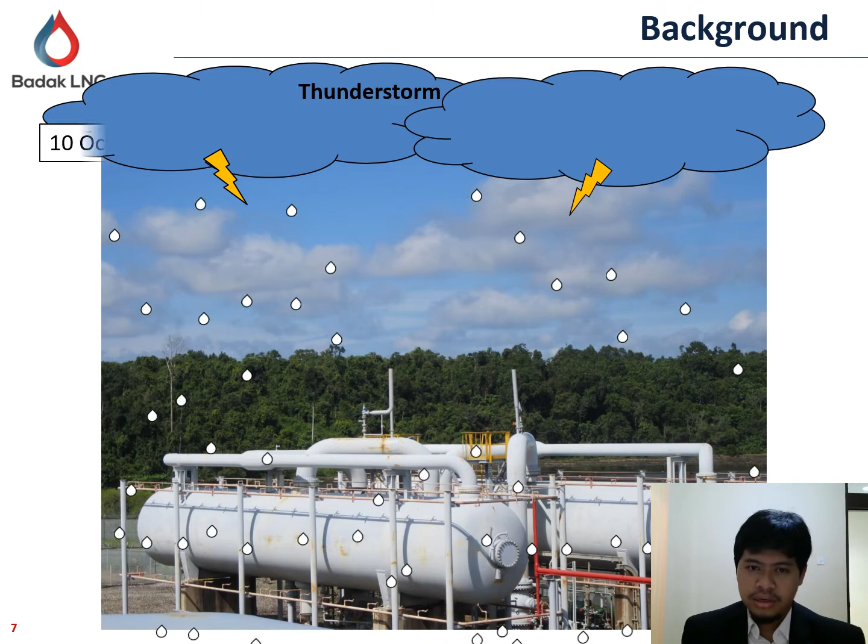Then we go to the next agenda, background and objective. It happened in our plant on 10 October 2016. A fire occurred at the vent stack of the knockout drum. The knockout drum is the entrance of the gas inlet, which will be processed into LNG product.

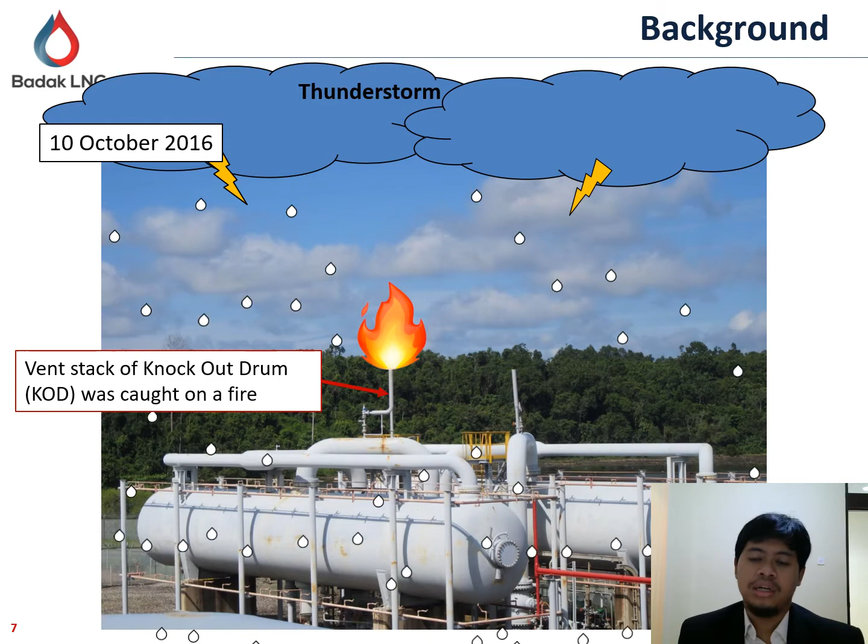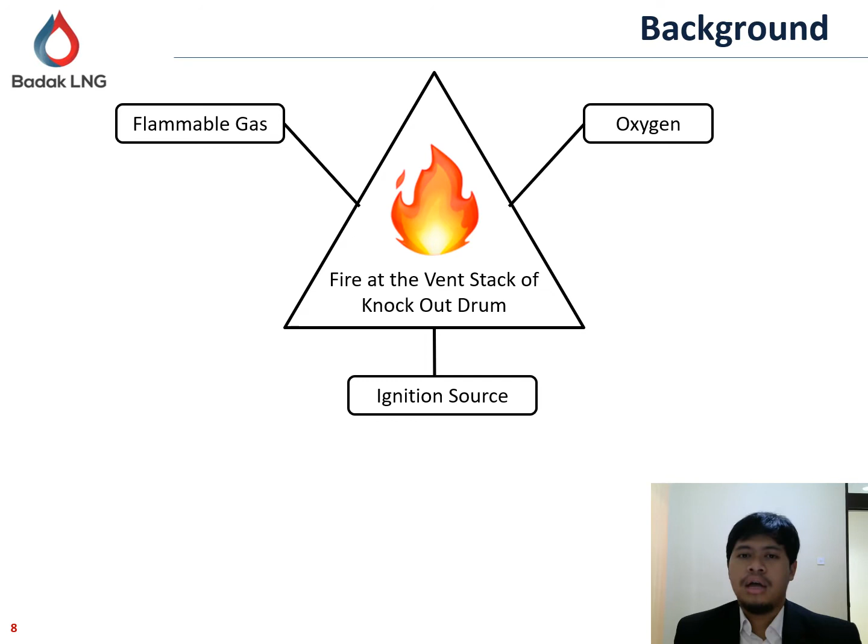As we know, based on the fire triangle, the fire on the vent stack of the knockout drum could be caused by the presence of 3 elements. The first is oxygen, the second is flammable gas from the feed gas, and the last is an ignition source. From the investigation, there are 2 causes of the ignition source. The first is corona discharge, and the second is a lightning strike. We call these 2 items atmospheric electricity.

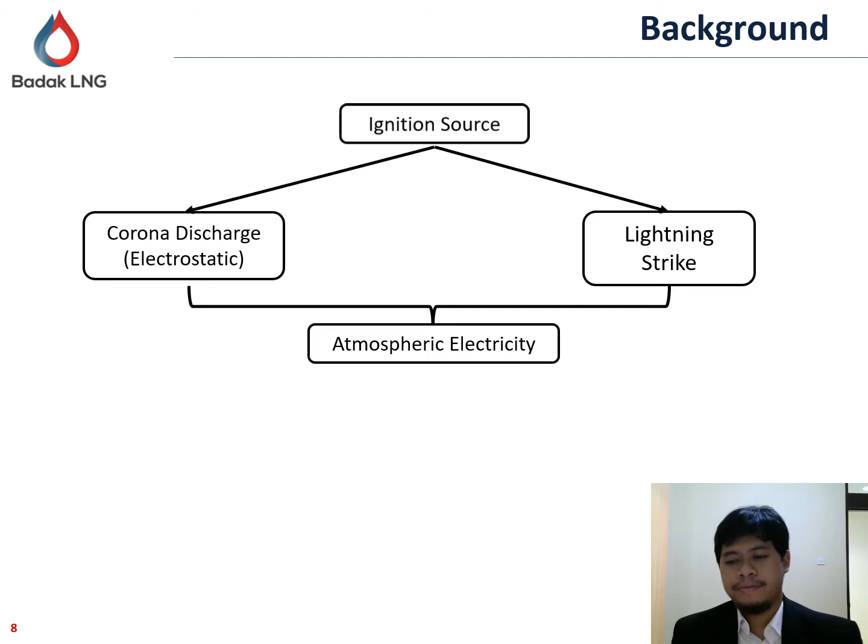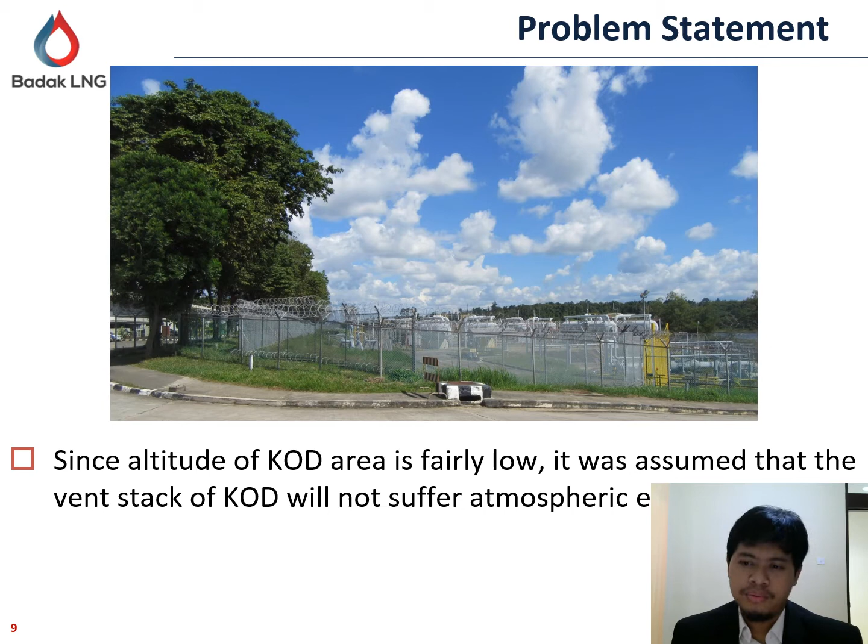This is the layout of the knockout drum area. The altitude of the knockout drum area is fairly low. It was assumed that the vent stack of the knockout drum would not suffer atmospheric electricity, and there are some high trees surrounding the knockout drum area, so it was assumed that the area is safe from atmospheric electricity, either from corona discharge or lightning discharge.

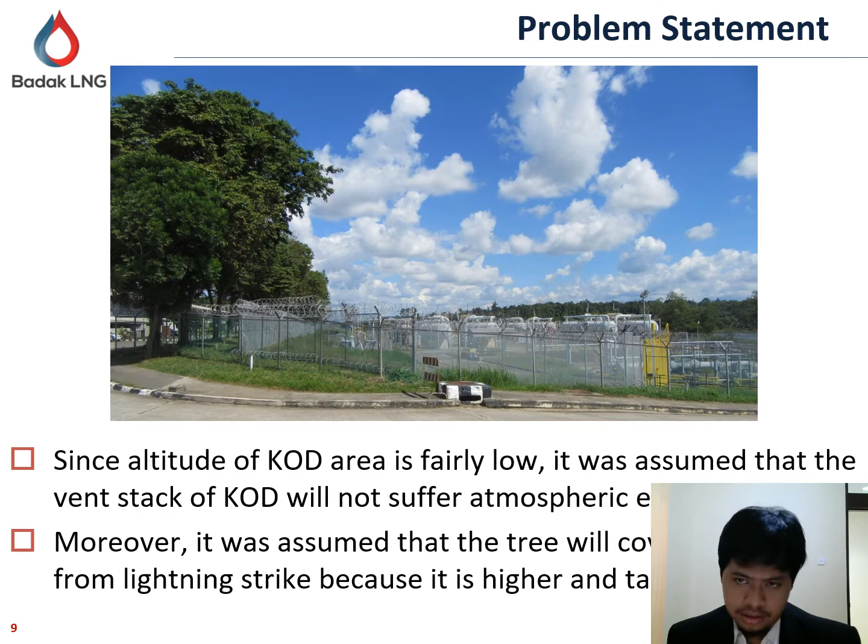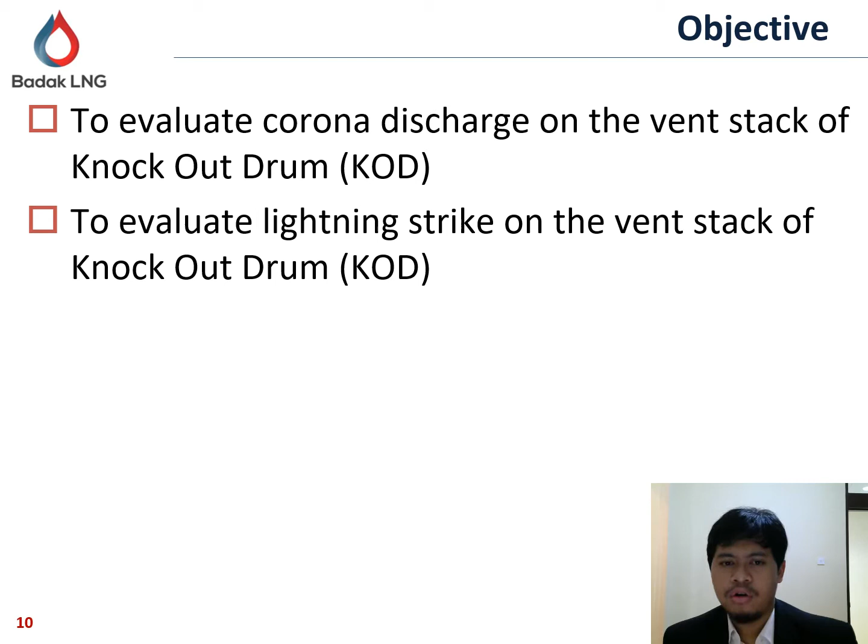However, from the investigation, the fire incident was caused by the presence of these 2 causes. So my research is, first, to evaluate the corona discharge on the vent stack of the knockout drum, second, to evaluate lightning strikes on the vent stack, and last, to design a protection that can protect the vent stack from atmospheric electricity.

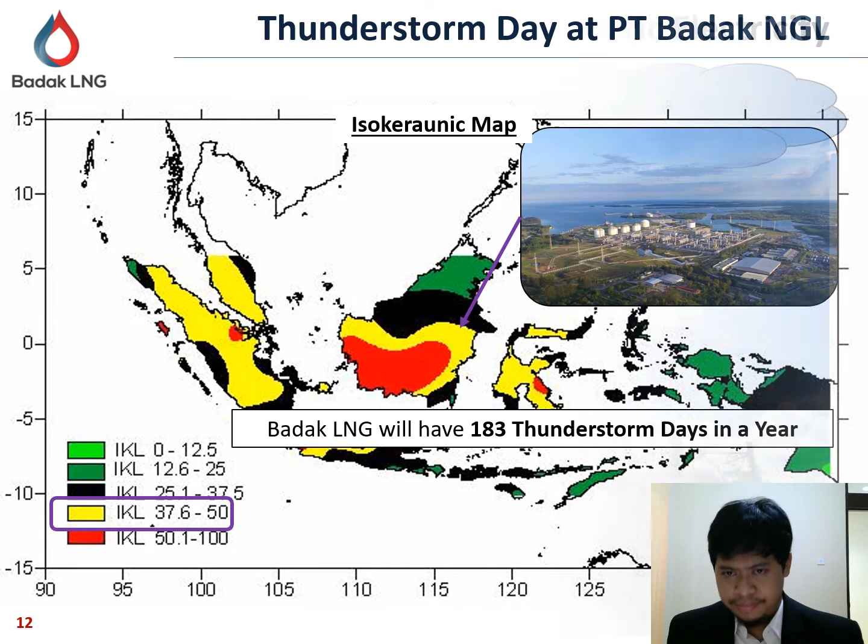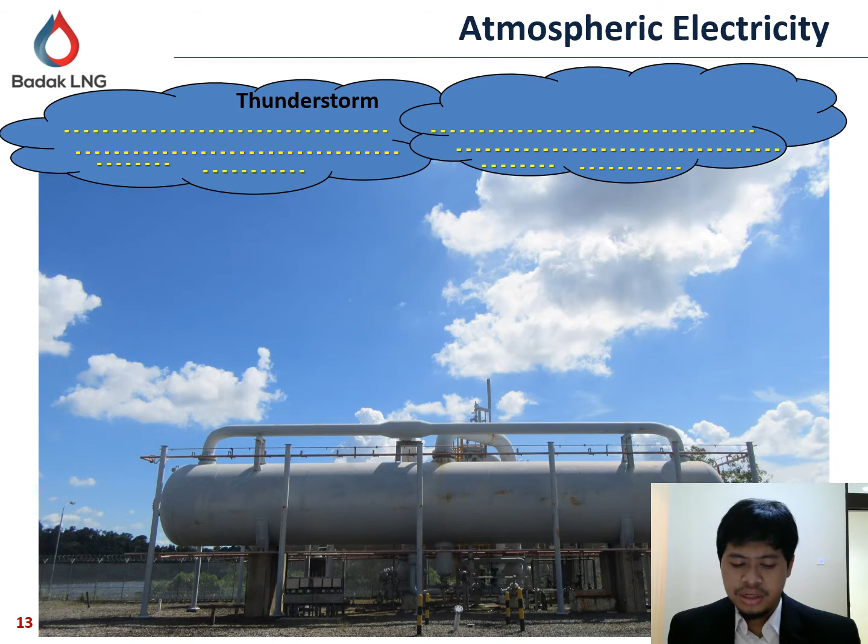If we look at this thunderstorm, during the thunderstorm the lowest layer of cloud has a negative charge. It induces the ground to have a positive charge. Because there is a different charge between the cloud and the ground, there will be an electric field from positive to negative. The electric field follows this formula.

If the value of the electric field is more than 30 kilovolts per centimeter, the dielectric strength of air, the vent stack will have a high probability of being struck by lightning because it has a smaller distance than the others. And the dielectric strength is the ability of air to prevent electric current flowing from negative to positive.

And then for the second, during the thunderstorm, it also affects the electrons and protons in the air. The protons will move up to the cloud and the electrons will go down to the ground. There will be an equipotential Va, which is made up from the electrons that go down to the ground. Because there is a different charge between the equipotential Va and the ground, there will be an electric field from positive to negative. The electric field follows this formula.

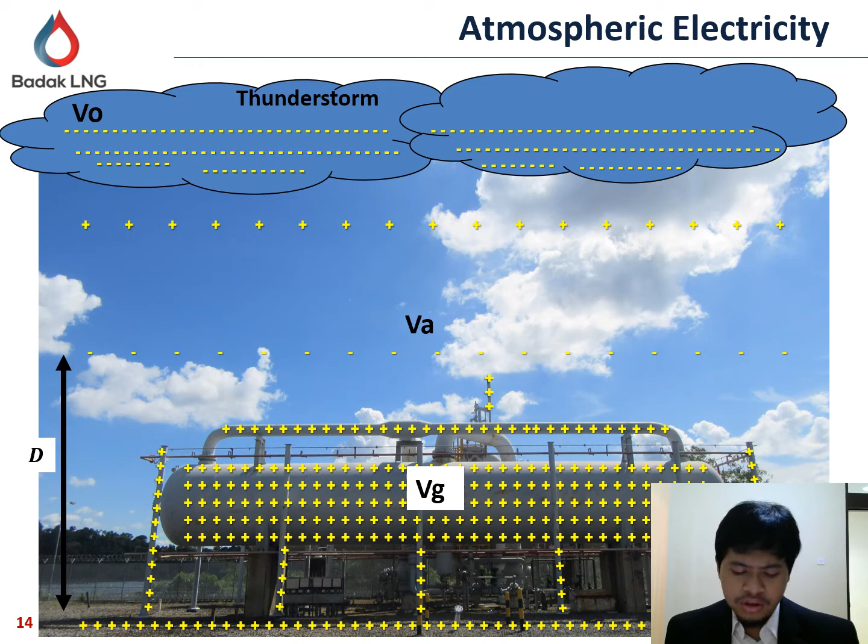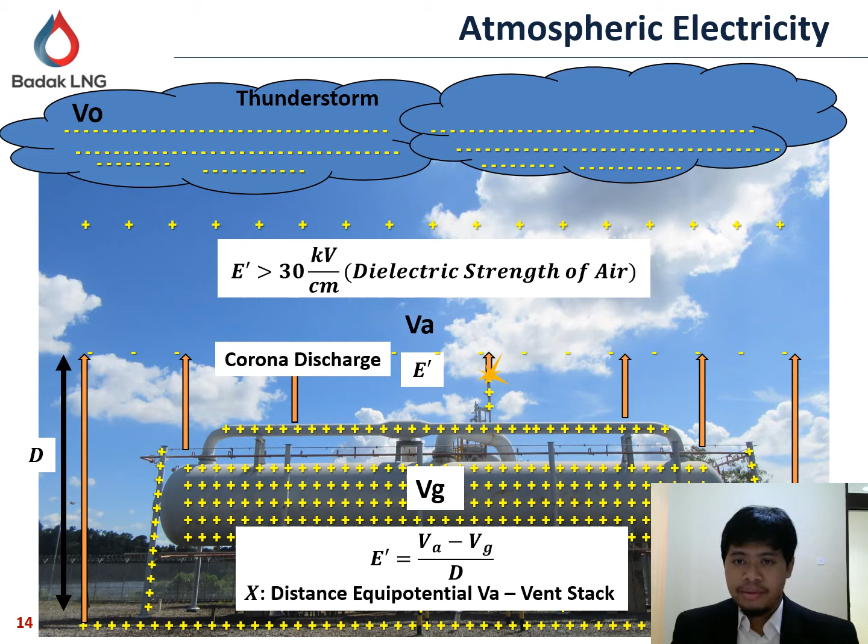If it is greater than 30 kilovolts per centimeter, the dielectric strength of air, the vent stack will have a high probability of corona discharge because it has a smaller distance than the others. That is the basic theory. And then we move to the atmospheric electricity evaluation. This is the next agenda.

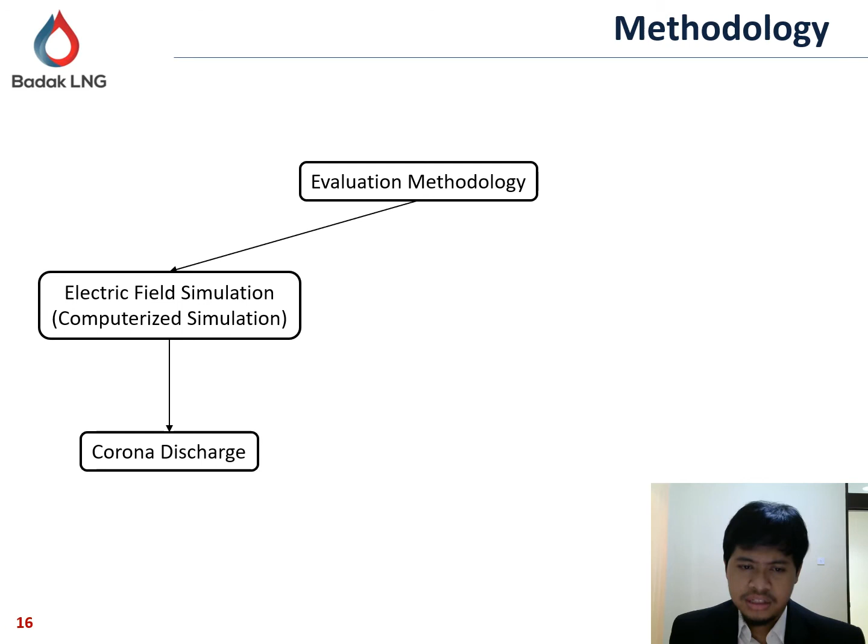Here I use two methods to evaluate the atmospheric electricity. The first is electric field simulation. I use computerized simulation to prove the corona discharge. The second, I use the rolling sphere method based on the standards NFPA 780 and IEC 62305-3, and also my company general specification. This method will be used to prove the lightning strike.

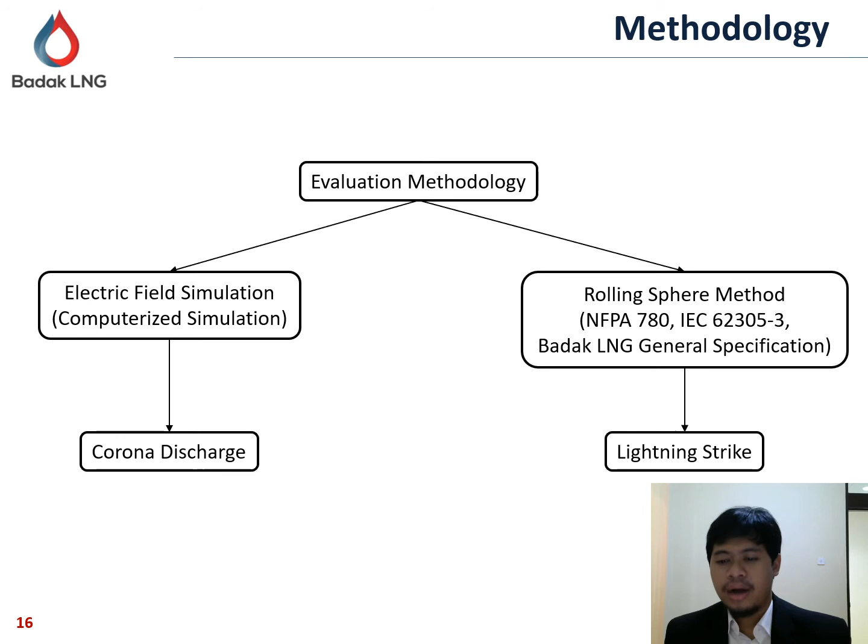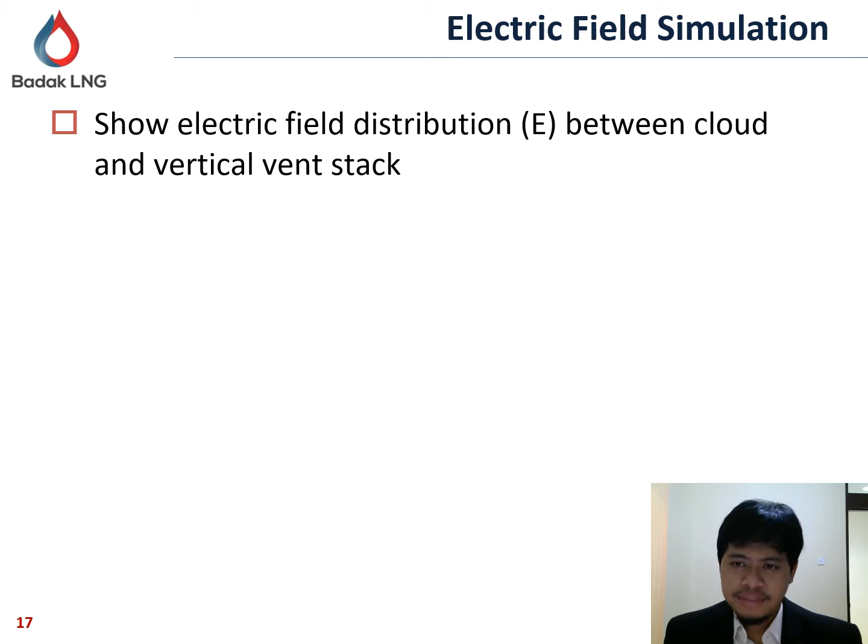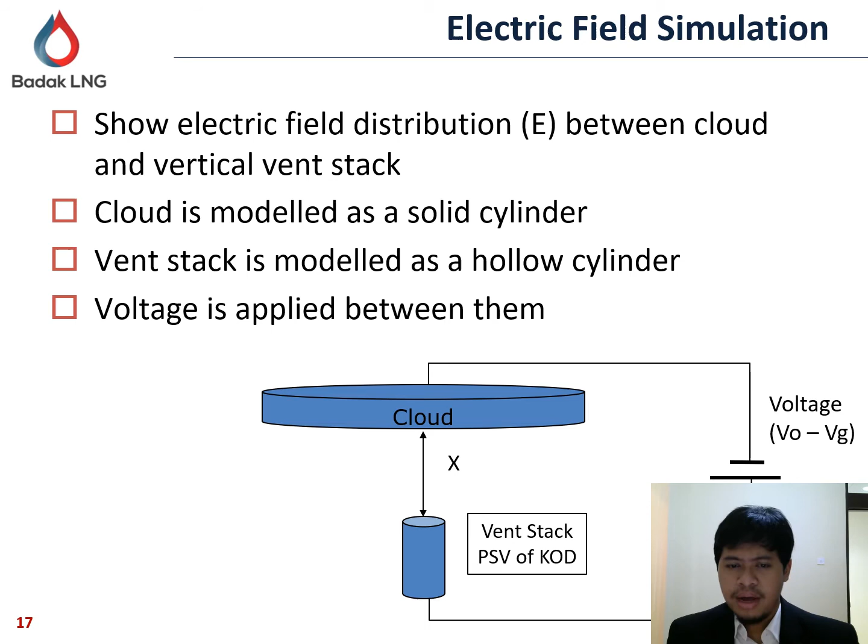And then this is the electric field simulation. The simulation is used to show the electric field distribution, or E, between the cloud and the vertical vent stack. The cloud is modeled as a solid cylinder, and the vent stack is modeled as a hollow cylinder. The voltage is applied between them, and there will be a distance between them. And this is the model and parameter simulation.

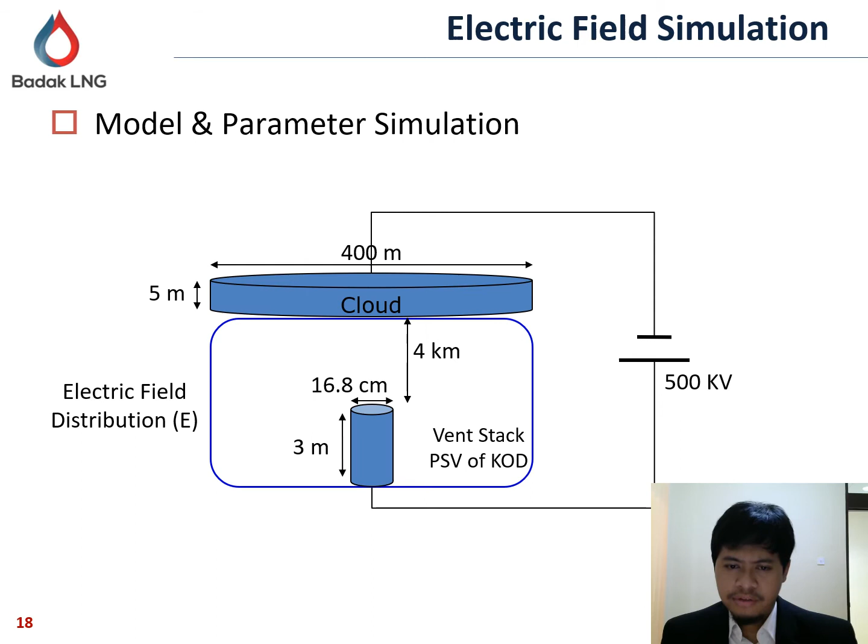Here we model the cloud with a 400 meter diameter and 5 meters thickness, and the distance between the cloud and the vent stack is about 4 kilometers. The vent stack has a height of 3 meters and a diameter of 16.8 centimeters, and the potential between the cloud and the vent stack is about 500 kilovolts. This model will be simulated using the electric field simulation.

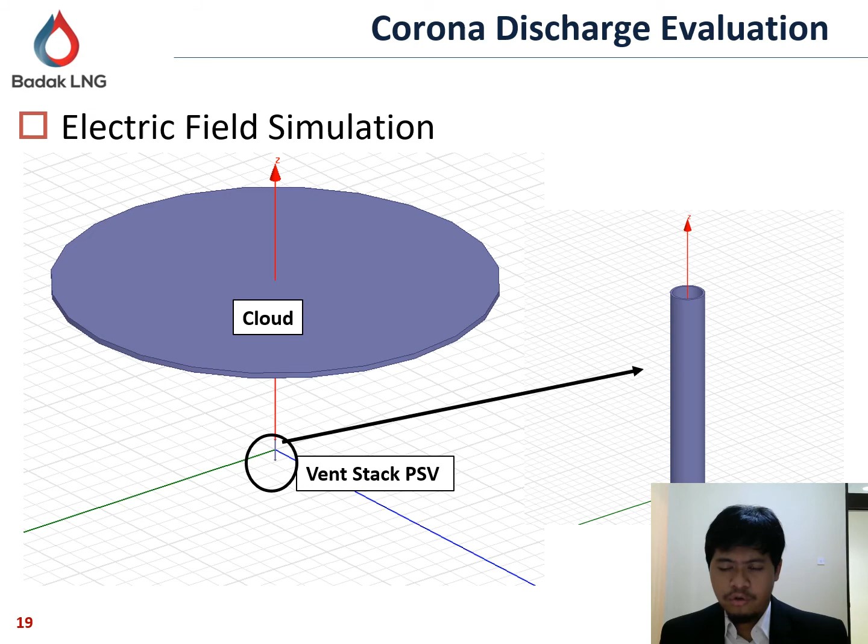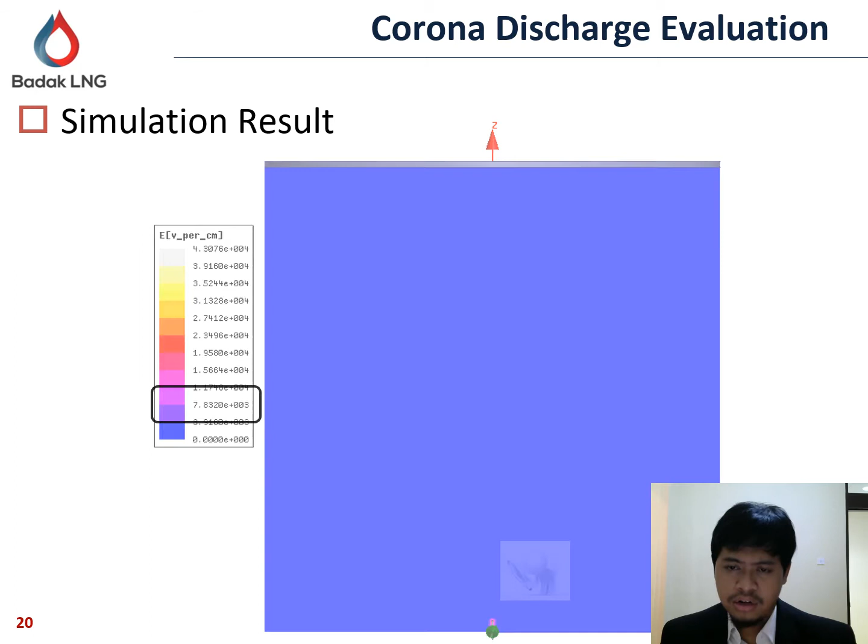This is the simulation in the software. I use the Ansoft Maxwell software. And this is the simulation result for the existing condition. We can see that most areas at the top of the vent stack have an electric field up to 35.2 kilovolts per centimeter. It means that it is larger than the dielectric strength.

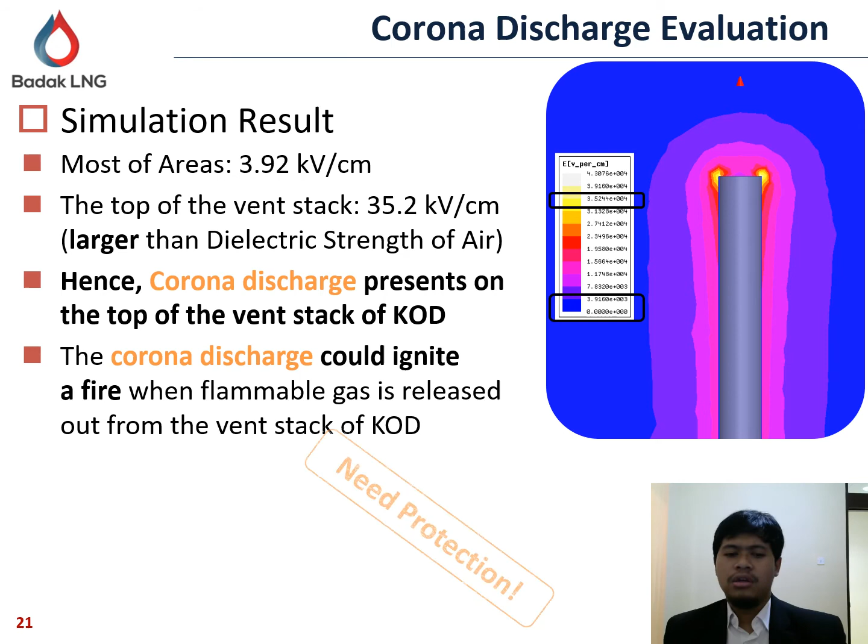So we can say that corona discharge is present on the top of the vent stack. And this corona discharge could ignite a fire when flammable gas is released from the vent stack. So this vent stack needs protection.

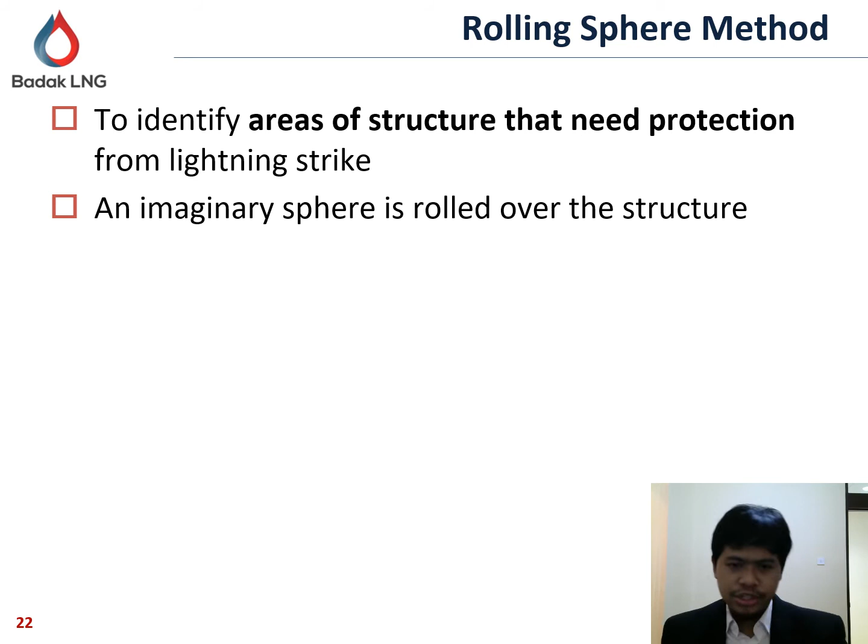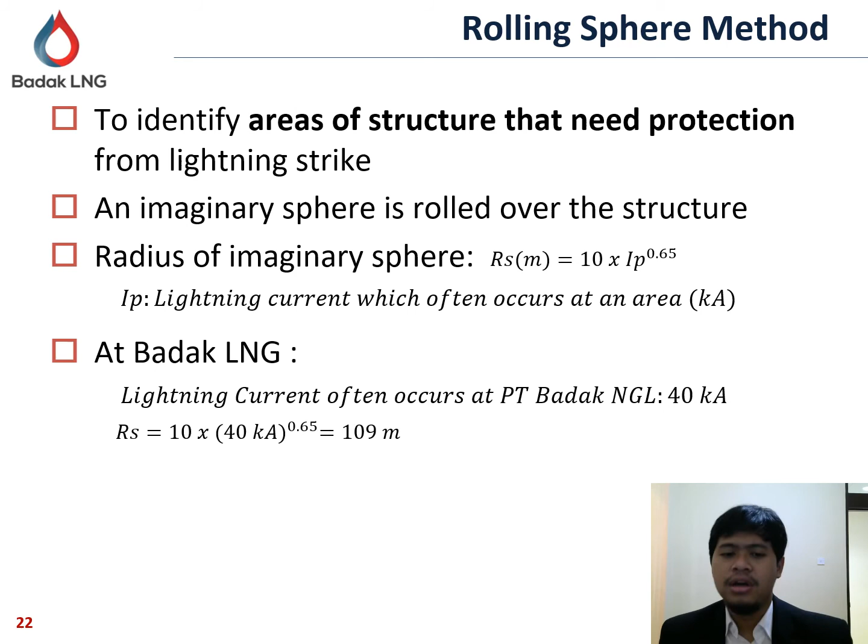And then the second method, I use the rolling sphere method to prove the presence of a lightning strike. This method identifies the areas of a structure that need protection from lightning strikes. An imaginary sphere is rolled over the structure, and the radius of the imaginary sphere follows this formula: the radius is 10 times the lightning current to the power of 0.65, with the lightning current in kiloamperes. For Badak LNG, based on the research, the lightning current is about 40 kiloamperes, so the radius will be about 109 meters.

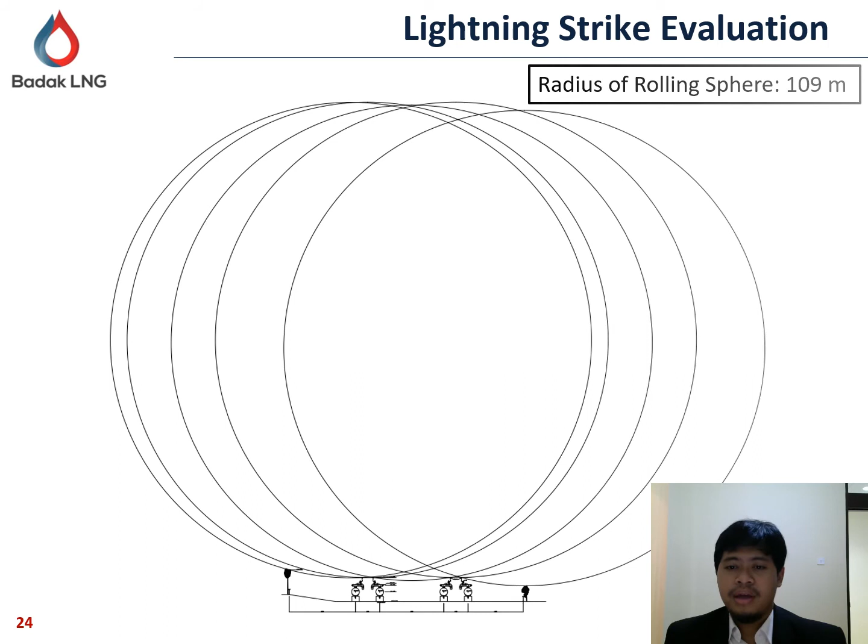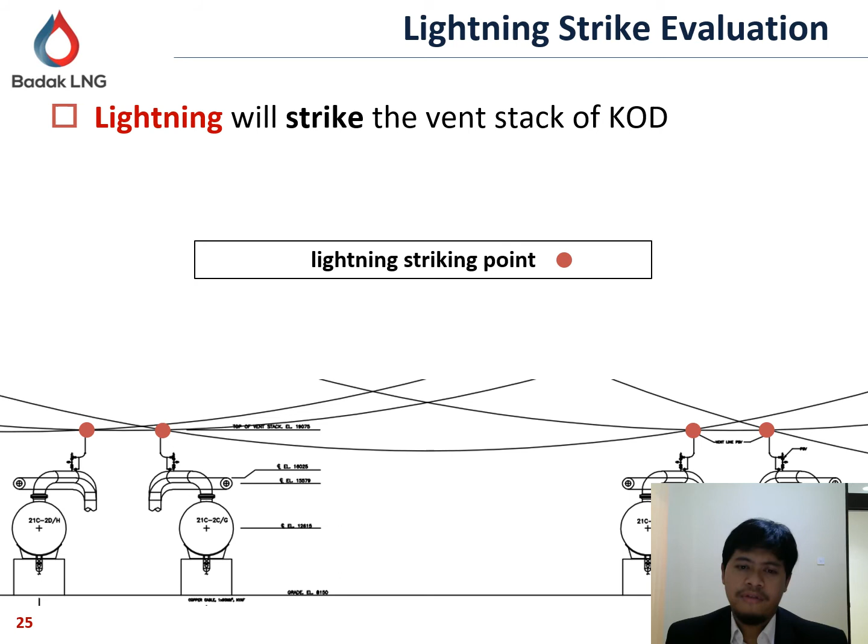We can see that because the rolling sphere radius is up to 109 meters, the area looks small. And then this is the evaluation. We can see here that with the rolling sphere method, the rolling sphere touches the vent stack, so the lightning will strike the vent stack of the knockout drum. If flammable gas is released out from the vent stack, the lightning strike could ignite a fire, so here lightning protection is required.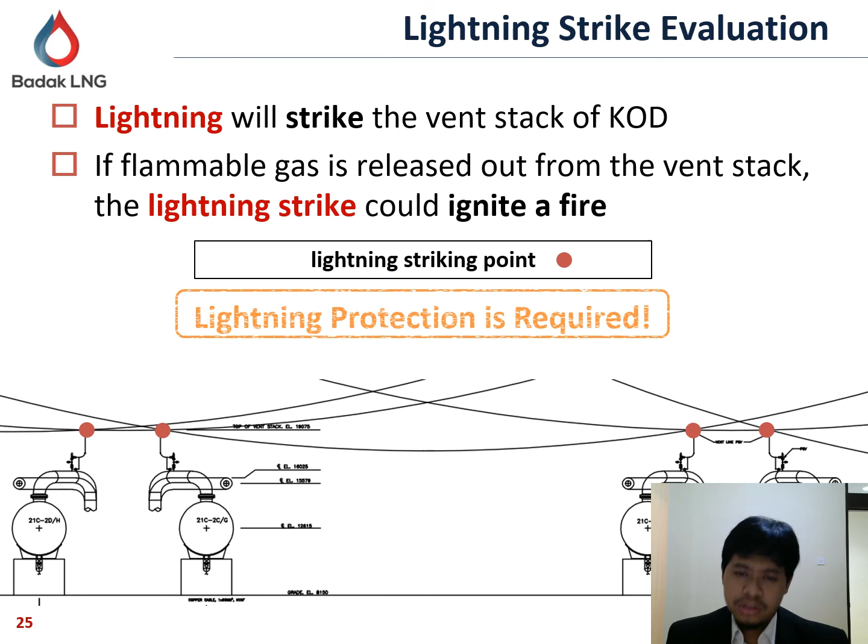And then from the two evaluations, we have here a summary: the electric field simulation showed that corona discharge will be present at the top of the vent stack, and the rolling sphere method showed the lightning will strike the vent stack of the knockout drum. So here the vent stack requires protection.

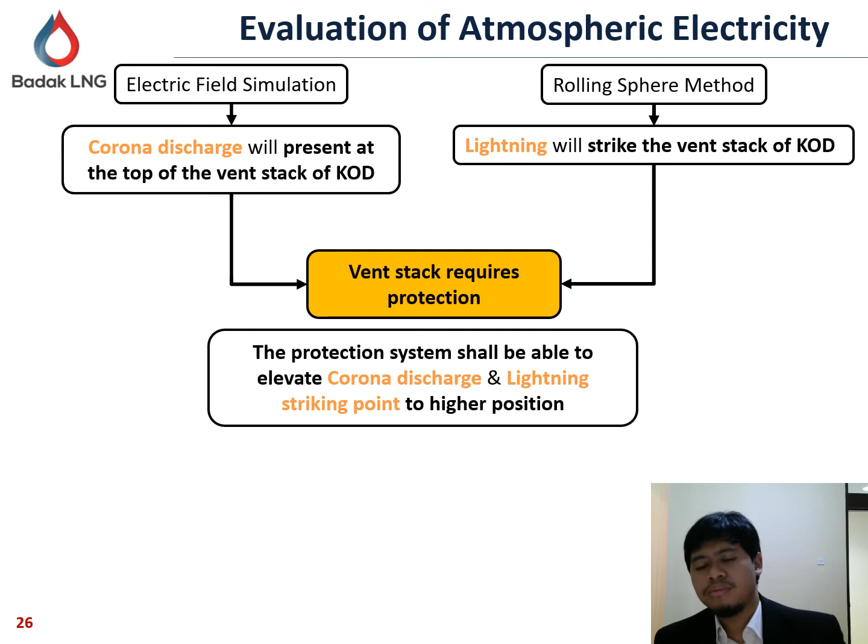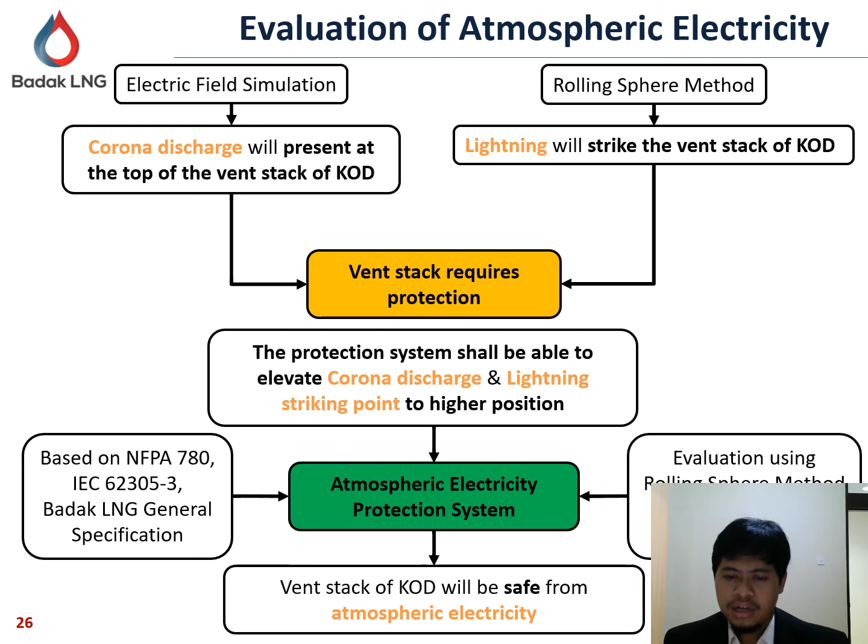The protection system shall be able to elevate the corona discharge and lightning striking point to a higher position, and we design the atmospheric electricity protection system from the NFPA, IEC, and our general specification, and then we evaluate the protection using the rolling sphere method and also the electric field simulation. And we have a target that the vent stack will be safe from atmospheric electricity.

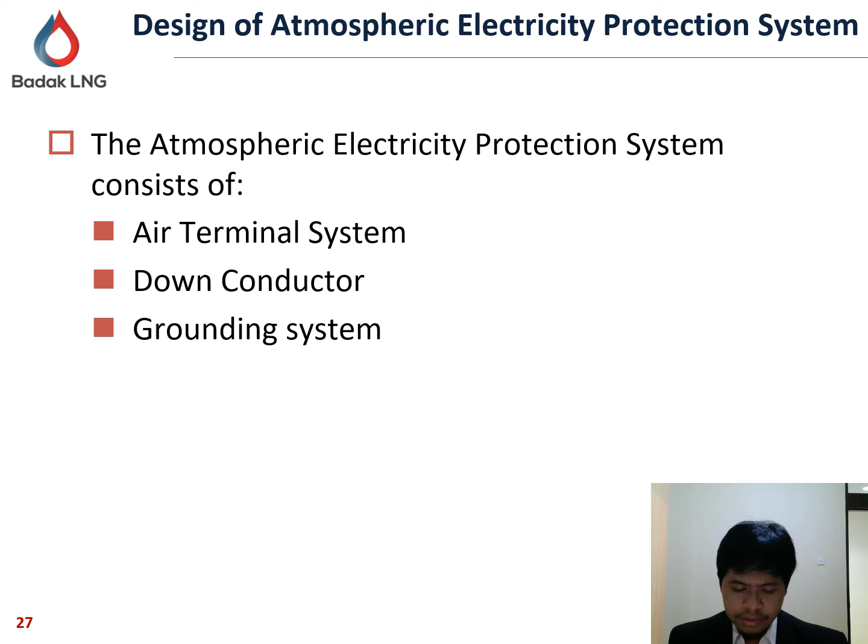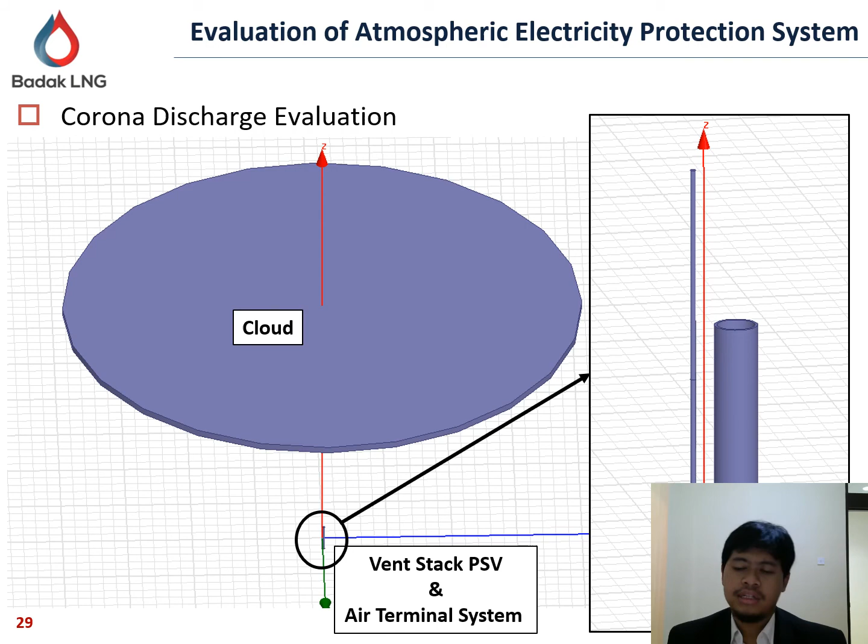And then this is the evaluation. We start with the electric field evaluation. This is the design for the atmospheric electricity protection system. And then here we can see that the corona discharge evaluation shows most areas have an electric field of about 14 kilovolts per centimeter, with the top of the vent stack at about 27 kilovolts per centimeter, which is smaller than the dielectric strength of air.

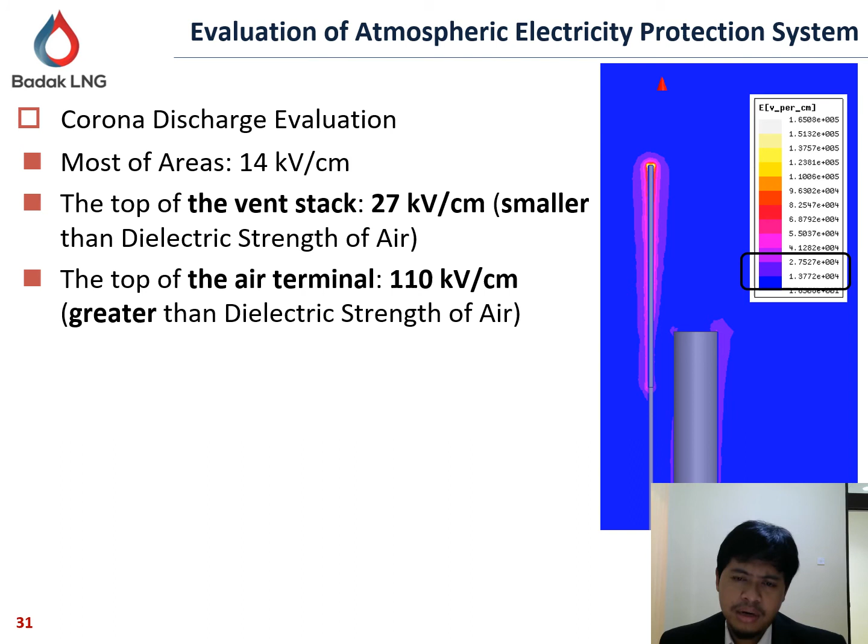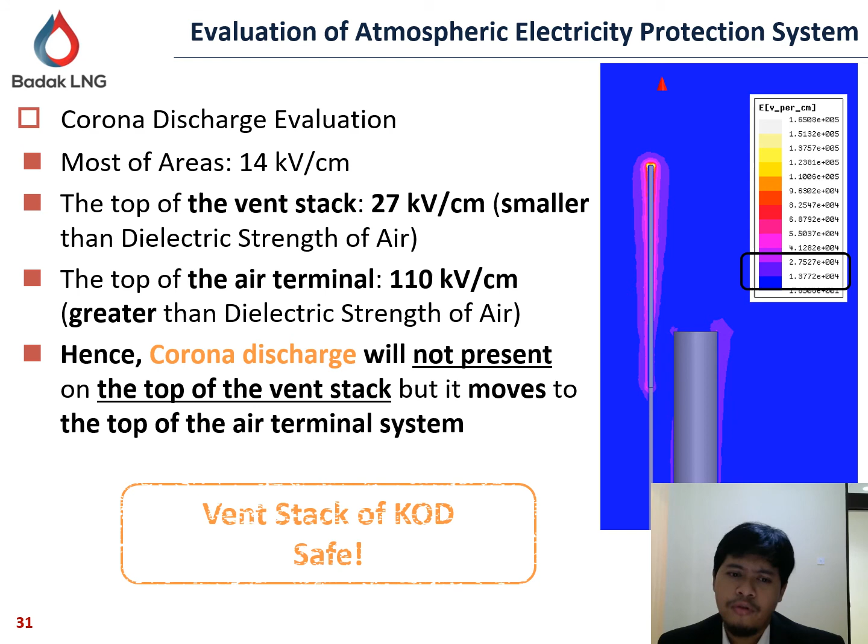It means that the vent stack is safe from the corona discharge, but at the top of the air terminal, we can see that the air terminal will have 110 kilovolts per centimeter. So it means that the corona discharge will leave the vent stack and move to the top of the air terminal. So the vent stack of the knockout drum is safe.

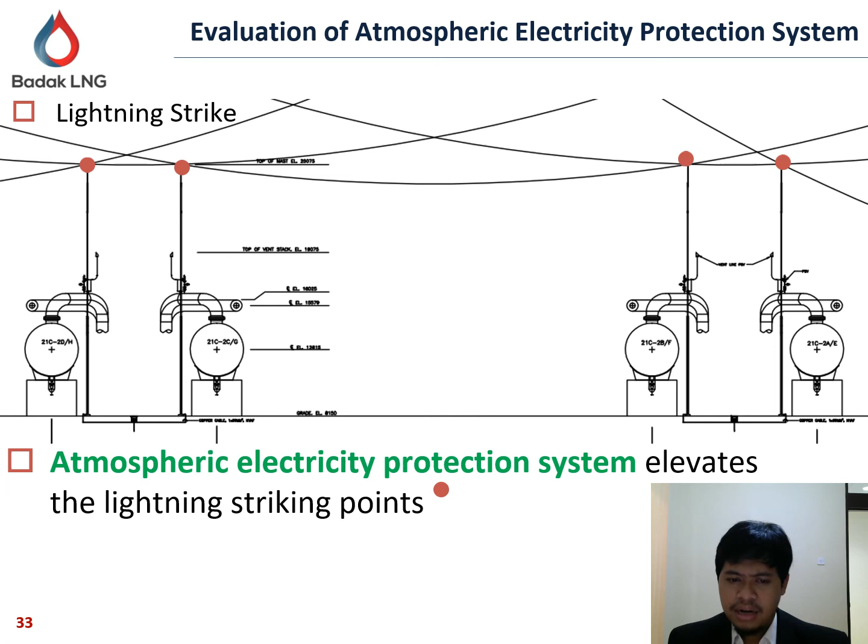And for the lightning strike, we use the rolling sphere method. Here, we roll the sphere, and we find that the atmospheric electricity protection system elevates the lightning strike point from the vent stack to the lightning terminal or air terminal. So the lightning will strike the terminal, not the vent stack. So here, the vent stack of the knockout drum is safe from lightning strike.

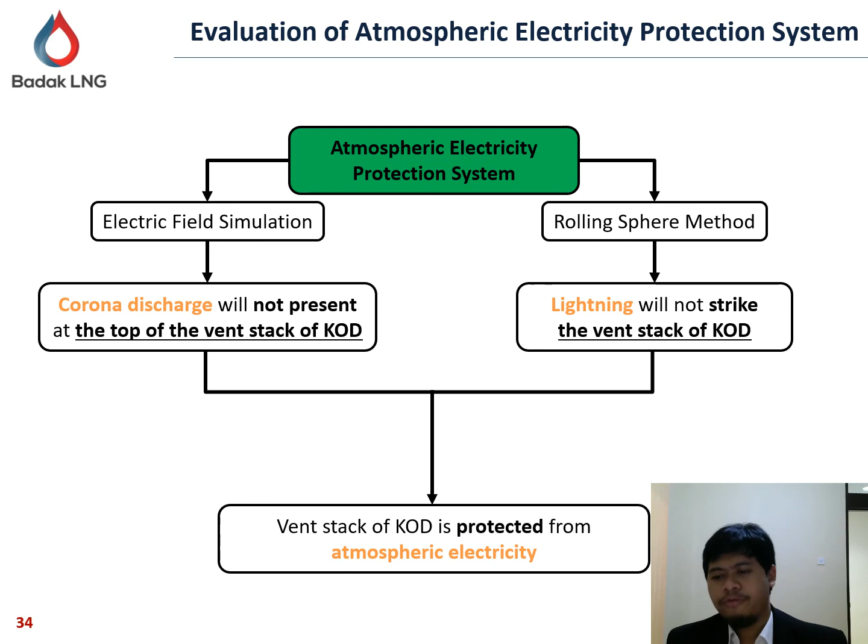We can see from these two evaluations of the atmospheric protection system that the protection system can save the knockout drum from the corona discharge, and second, from the rolling sphere method, the lightning will not strike the vent stack of the knockout drum. So here, the vent stack of the knockout drum is protected from atmospheric electricity, both from the corona discharge and the lightning strike.

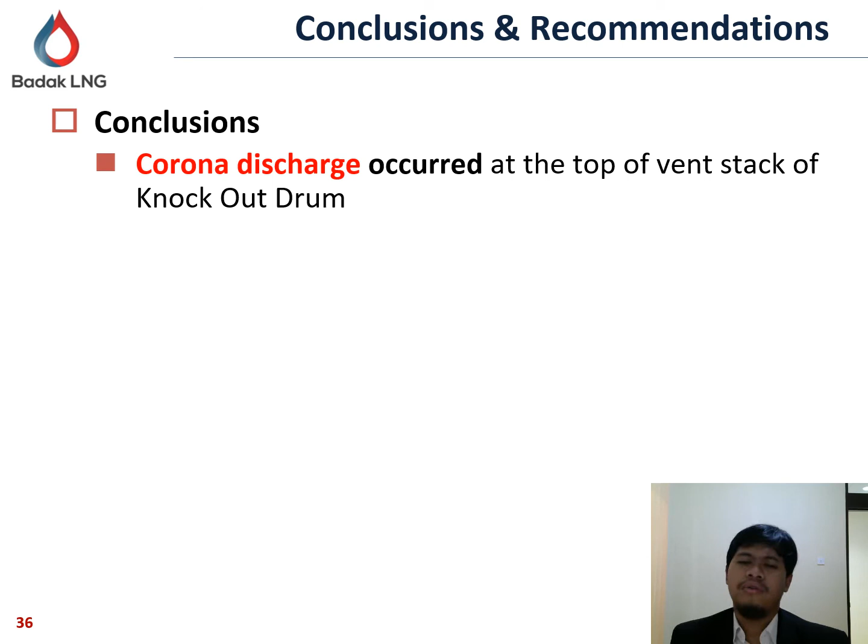And we have the last agenda here, conclusion and recommendation. The first conclusion is corona discharge occurred at the top of the vent stack of the knockout drum. We proved it with the electric field simulation. And second, the lightning struck the vent stack of the knockout drum, as we proved with the rolling sphere method. And last, we have an atmospheric electricity protection system that can protect the vent stack from atmospheric electricity, both corona discharge and lightning.

And the recommendation from this research is you have to install the atmospheric electricity protection system on every vent stack of a knockout drum to save the knockout drum from atmospheric electricity, both corona discharge and lightning discharge.